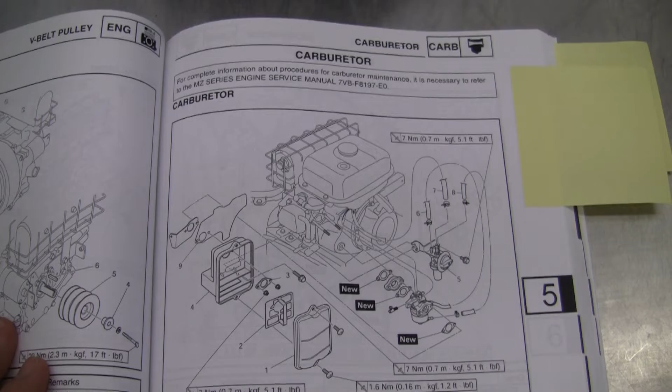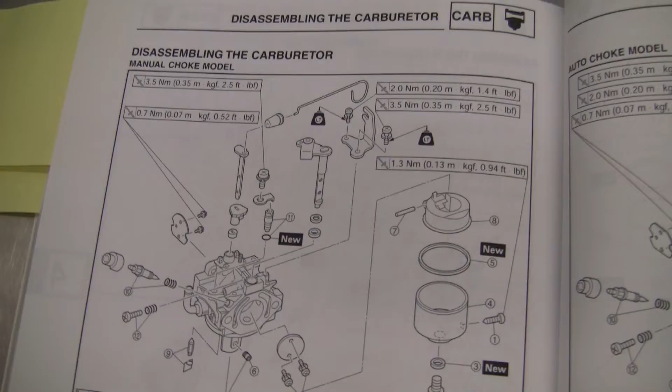Per usual here, I have the section on the carburetor in the snowblower manual. And we've also got section 4-1 of the engine manual. All right, we're gonna take our trusty Phillips screwdriver and take off this cover. So we've got the carburetor here. It's quite obvious, I think.

And the next step is to take off the air filter. Now, there is no air filter inside here because you're using this in winter. There's not supposed to be any dust, etc. So if you look inside, it's all just a passageway for the air, so no big objects will go in. There's the screen inside you want to take out. It goes in like this.

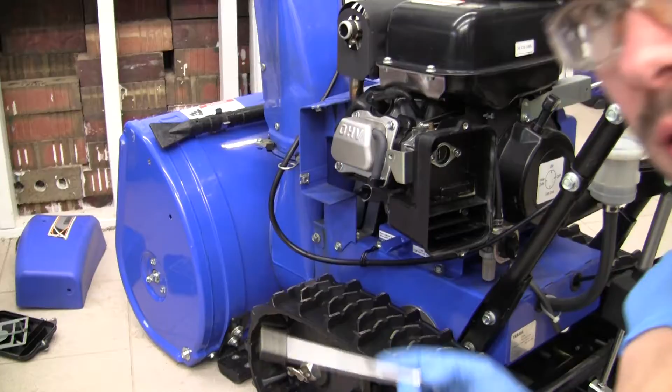So now we're going to use a 10mm socket to take off this plate that's in here. So there's 2 nuts and a plate in there. Oh, and there's 1 bolt down below.

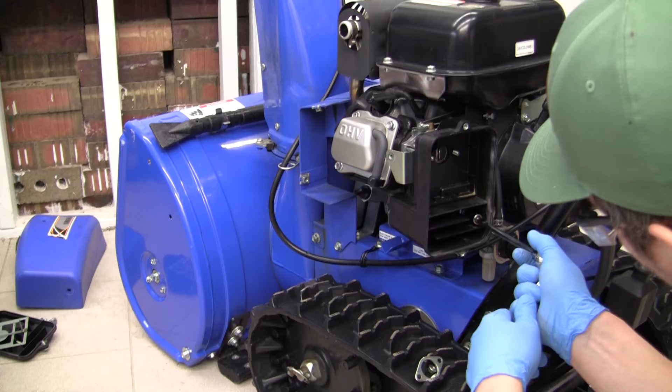Then there's this plate here. It's called a flap, apparently. So we're gonna keep going. The instructions say to remove this fuel cock, but I don't really think that's necessary. I don't want to remove more than I have to.

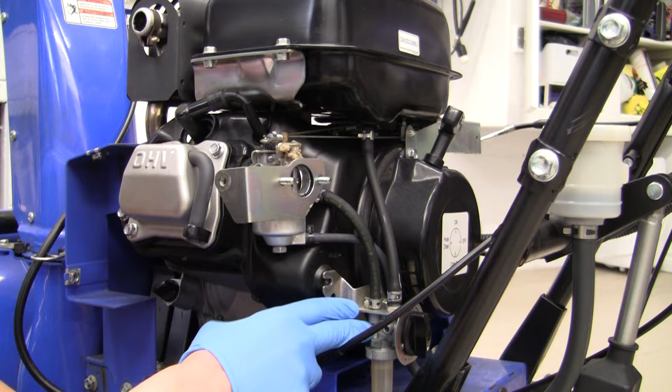So we'll then get this plate off, and there's a gasket there behind it. So this gasket kind of says to use a new one, but if you take it off carefully, we should be able to avoid tearing it. And I wouldn't use a new one unless it tears. Here, we'll put it back on in the same way. The carburetor has the 2 hoses.

We've got the drain line and the fuel supply line. Now, important point, this fuel cock is in the downward position and the carburetor drain position. So that means that the bowl has been drained through the small line, and the supply might have fuel in it because it's been turned off, but the carburetor bowl is empty. So I'm gonna unhook the hoses at the top here and let them hang up.

So I'm going to use a pair of curved needle nose and get in to remove that clip. And then my arm's kind of in the way here, but I'm gonna grab this clip and remove it as well. Slide it back. Now you wanna be gentle with these hoses. Take a flat blade screwdriver, pry off the hose. So gonna put the hose up in here temporarily. Then the bottom drain hose, pull off the drain hose. So now I'm gonna put both hoses up in here.

Here's the choke cable. And you can see that when you push the throttle lever, then finally the choke will engage and close off the air. So we've got 2 steps left to taking the carburetor off. We have to take the choke cable off, and then this will come apart by just turning it.

So to take this off, what I'm going to do is mark in blue with a marker where exactly it's set, so that after I take it off with a small Phillips screwdriver, I know where to put it back. So I'll then slide that off the end of the cable if I can. There we go, and I've got a blue mark on there as to where to put it back. So I'll keep this handy. And then we got the carburetor, and here there's the cable, which we can now get off.

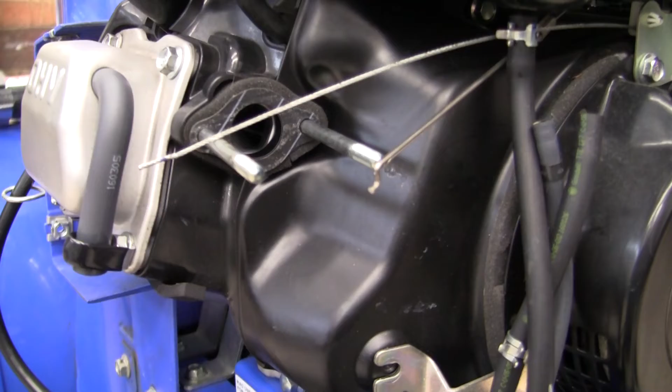So keep in mind here, there's another gasket located here. I wouldn't bother taking that off. If it's not torn, I would reuse it. And then in here, we can actually see the valves on the intake. So we'll let all this stuff dangle here while we go to the workbench.

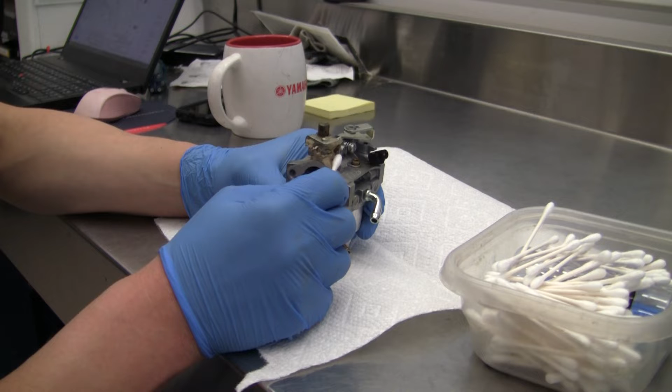All right, here we go. So we have the carburetor out. We've got the choke on the intake here. On the outlet side of the carb, we've got the air flapper, the slide or whatever it is. So what I'm gonna do here, because Yamaha was so generous with their grease, I'm gonna remove this grease so that I can avoid getting it everywhere and I can actually see what's going on in there.

All right, so the grease is cleaned off from that area. Now what we wanna do is make sure, while doing a carburetor, that we don't get anything in this port, we don't get grease or dirt crammed inside here. Because anything that blocks these ports is going to give us some problems. And then Luke's going to be pretty angry for taking something apart that really didn't need to be taken apart.

So we can see this moves nice and free, no resistance, nothing's hung up. When I look inside, it looks very clean, really. It looks pristine. So what I'll do now is I'm going to start by getting the bowl apart. And reminder, you see the clean workbench? Please, please try to follow this.

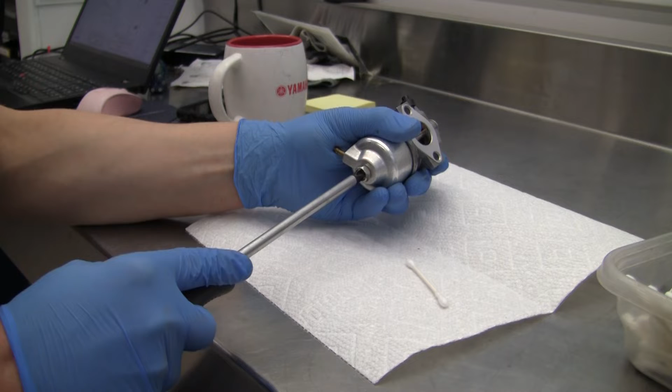So we're going to use our trusty Phillips screwdriver, and that is quite tight. And we got it. So here we've got probably a copper or fiber washer. It says to use a new one of these, but I'll probably avoid doing that.

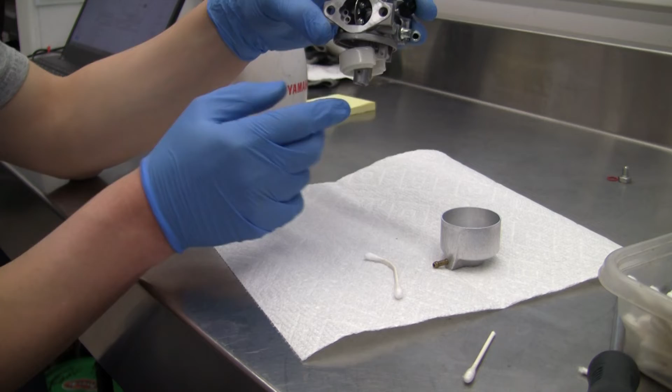So then pull the bowl chamber, or the chamber, sorry, off. We can see there's a gasket on the inside. So here we see we've got the float. Here we see the inside. It's pretty clean, to be honest.

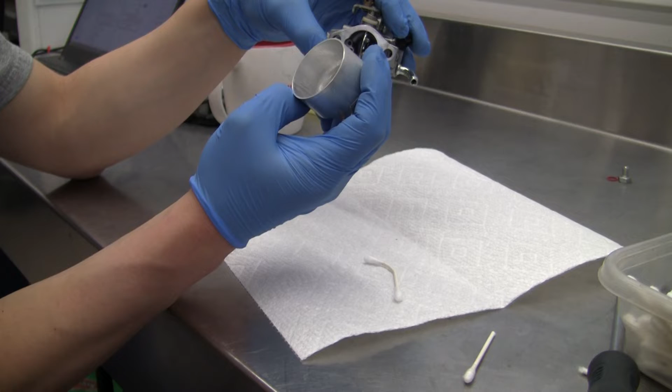It's quite clean, I think. A little bit of maybe deposits in the bottom. We see the drain is nice and clear. We see how the drain's set up in the bottom there. So what I'm gonna do actually is use my pick, and first of all, I'm gonna make sure the pick is clean, because that's a terrible thing to do, is stick a dirty pick in a carburetor.

So I'm gonna take this clean pick and get that gasket out. Now you wanna not tear it, so I'll kind of run the pick along the groove there, gently, both sides. This is a Mikuni carburetor. There you go, pop that out, throw that there.

Now we take the float out by pushing this pin out. Pin should come out, let's see. The pin should push out from one way or the other. Let's try it here. Oh, it's pretty tight. Yeah, that doesn't want to get out of there right now. I don't really feel like breaking it, obviously.

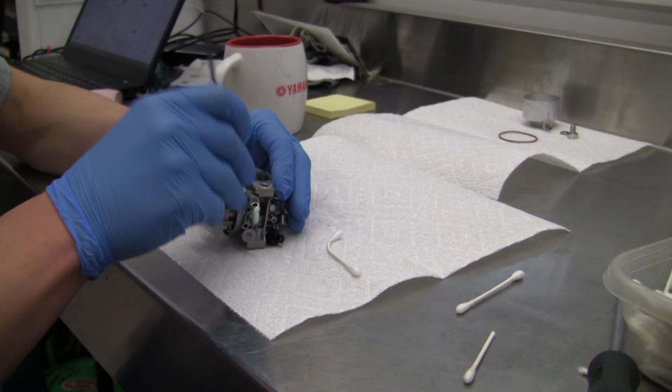All right, so we could push this pin out by tapping it gently. Something like a flashlight, nothing too heavy. I've seen people break these cast carburetor parts before, and if you break that, you're not gonna be able to fix it. So you wanna just tap that pin gently so it comes out.

Then once the pin's loose, now you'll see the orientation, I took mine out. Now this pin's actually flattened on the one end, so it's not gonna push out that way. You're gonna have to push it out the other way, otherwise the flat's gonna get caught. I'm gonna put this pin over there. I'm gonna now take the float out.

Now you see here, it's a plastic float with a non-adjustable float height. It's a plastic tab. We've got the needle assembly, which has the small carrier there, or I call it a carrier, I'm making names up now. So it's really hard for me to show on this camera, but this needle assembly that's attached to the float,

you want to look at the end of it, make sure it's not worn. And you would see if it's worn because you'd see indents or grooves in it. But here it looks really, really nice in my opinion. I wish I could get a close-up, but it doesn't really work well on the camera. So I'll put that down.

Now we've got that apart. We can look in the orifice where that component goes. So here we got the inlet, and the inlet comes in and fills the bowl. And once the float rises, it blocks off the fuel that comes in. So we can just kind of blow on this. The air is coming out of there, no problem.

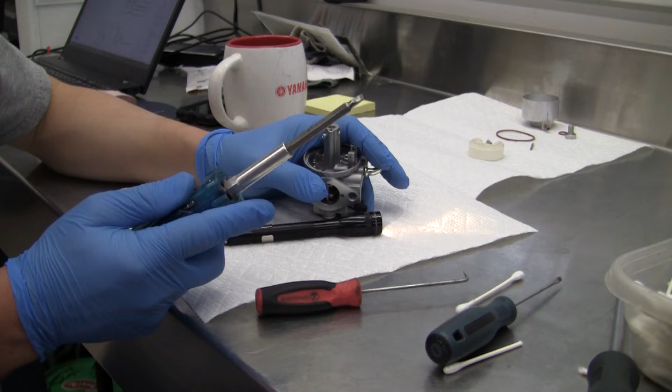You want a screwdriver ideally that's the entire width of the jet so that you don't strip it. So here we're gonna get a proper screwdriver in that main jet. We're gonna remove it, and we're gonna look through there. You look through and it is perfectly clean. We're then going to stick a proper screwdriver down in the hole here and remove that one. There we go.

And there we have it. So in here now, we wanna look down the center of this, but we also wanna look at the side ports. The side ports are perfectly clear, really perfectly clear. And I can look down the center and it's perfectly clear. So this is really, really good.

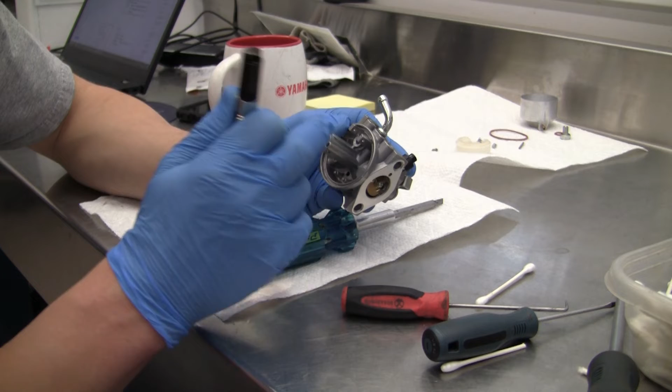So put that there. Now we also want to look where the needle sits to see if anything looks bad in there. And to me, there's nothing wrong inside there at all. There's no dirt, debris, varnish of any kind. All right guys, so there's some things I'm not going to bother taking apart. So if I took these two screws out, I could end up pulling the throttle assembly out, but I really don't see a need for that.

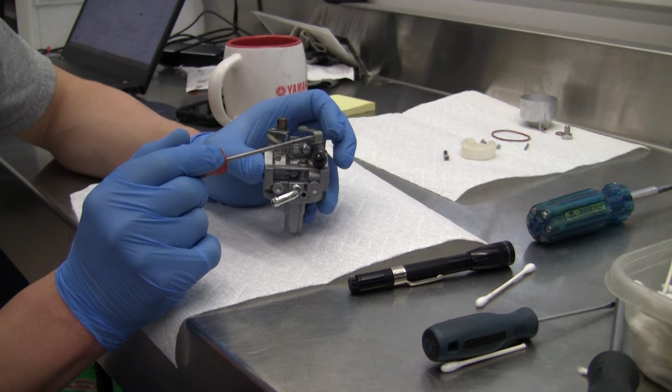I'm also not going to take apart the pilot jet, which is here. The pilot jet has an O-ring under here, which apparently needs to be replaced if you take it apart. Now, whether that's true or not, I'm not sure, but I don't really want to find out. We've got the throttle stop here, the throttle stop screw. I don't really feel like removing it just to have to reset it. It was set from factory and I don't really have a problem with that.

And then the choke assembly. I don't see a need to take the choke assembly apart. So the choke assembly is pretty simple. It just turns 90 degrees to block the air and some passages. We would take these two screws out and then pull everything out, but there's a spring and all kinds of stuff. So it's not a huge job, but I really don't think we need to do this for this video.

Principally, you want to make sure the jets are clear. The ones I've taken out, the needle's in good condition, and inside there's no dirt and there's no varnish and there's nothing. This is like a brand new carburetor is what it appears like. There's nothing at all that I can observe that's wrong with this thing. And I don't really want to start blowing air through there right now either because I don't want to get anything caught in there. So to me, really, really good, really pleased with it. It's a good thing to do, but if you keep your fuel clean, you shouldn't have any issues.

So what we're gonna do now is we'll put this back in there, stick that in the hole, and you don't want to over tighten these things. So you're gonna screw it in until it hits the bottom and then give it a little tighten, nothing crazy. We're gonna put the so-called main jet into the side. So once that's in there, I think these are aluminum too, so be careful. So you're gonna put that in, tighten it, don't over tighten that. And you have to take this side one out in order to get the inside one out.

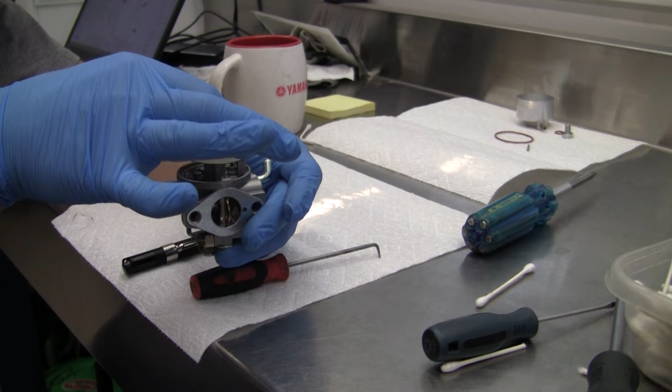Now with that done, we can put the carburetor upside down. Now what we're gonna do is hang the needle on the float and we'll drop that in there so the needle goes into the hole. Then we're gonna wanna put our pin back. So remember, the pin is flattened on the one side. So we're gonna put it in the side. It should go in very easily. You don't have to force that in there.

And once it goes through, we might have to tap it just the same. So what I'll do here, I'm just gonna tap it. That's it. Actually, I might like to get that in more than that. Let's see here. I'm gonna put the gasket back on. So this gasket's a bit hard to get in there. We're gonna have to coax it in. All right, I got the gasket back in there. You want to make sure to push it into that crack all the way around and don't get it twisted.

So now we're gonna put the bowl back on. So we just kind of put the bowl on. The hose will come out approximately where the other one did. I should have match marked these actually before I got going. And then we have what I believe is that copper washer. We'll put it on the bolt.

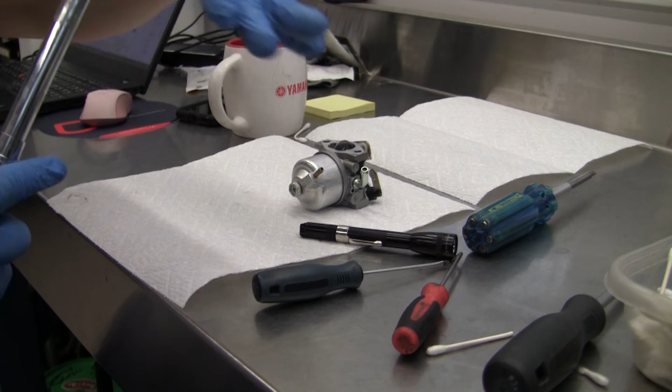So here we've got 9 Newton meters or 80 inch-pounds. I think that's tight enough. I'm not going to get this one torqued. Let's see where we're actually at. Let's try 60. Yeah, I'm not tightening that up that much. That's good enough for me. So there we go.

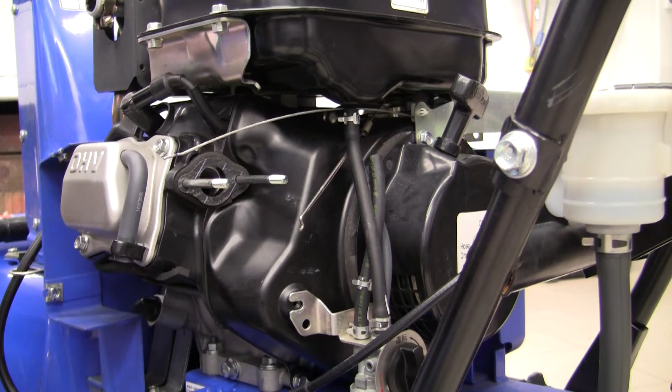That's the general disassembly of the carburetor. Now we're gonna get the carburetor mounted back on the snowblower. All right, so it's not a bad idea to have a look inside there with a flashlight. I had a look and it looks fine. So we're gonna take the carburetor, make sure your gasket is here. If it tore, get a new one.

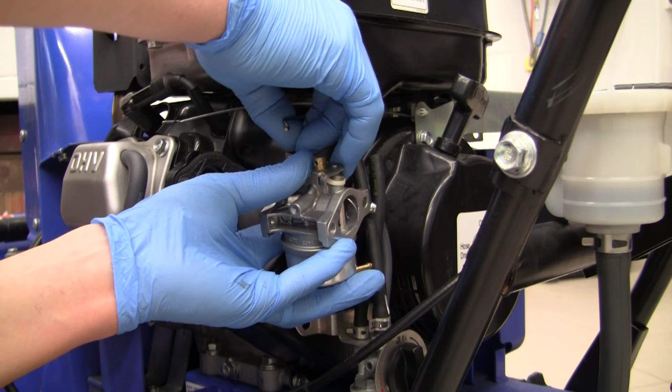What we're going to do is take the spring, we're gonna put it in that spot. Then we're going to tilt the carburetor so that we can get it like that. Then we're gonna raise the whole thing and insert it on. So I think I've gotten those actually twisted, which I don't want. So I'm gonna take that apart and go around. Now I'm gonna redo it, there we go. All right, perfect. So I've got the spring and the rod are not twisted.

I'm gonna put this back. It's gonna bottom out down there. And then I'm gonna take this gasket the same way I took it off. I'm gonna make sure it's clean. I'm gonna put it on. Then we've got this plate. I'm gonna put the plate on. We're gonna put the cable back through the choke assembly.

I'm gonna take the little collar with the spring and the screw. I'm going to slip it on, spring first. Then I'm going to find my mark, my Sharpie mark. Just pull a little bit out. There we go. We've got the identical position. Then I'm gonna take the Phillips and tighten that. So then we can test the choke. So the choke works.

So we're gonna put some Yamalube suspension grease just to replicate the factory install. We're now going to reconnect the fuel hose. So we're gonna stick that main hose on there. I'm gonna stick the drain hose on, the clamps rather. I'm gonna take the clamps, secure it on. I'm gonna take the other clamp and move it up and get it in there. There we go. So the 2 hoses are secured.

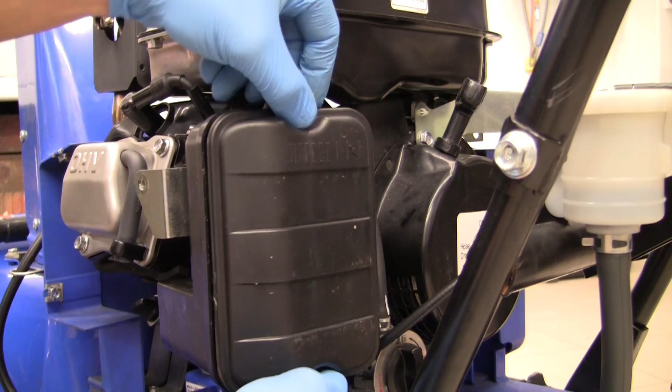So one of the final things you want to do is make sure that when you've reconfigured this that it still works and it holds. So for that I would say to put the choke on and see when its engagement point is and confirm that it works. You can see here as you get to the end of it, the spring kind of pulls in, but you can feel that choke come on the lever. So I'd say we're good to go on that. I applied a little bit of grease there, and then the throttle we're gonna make sure that it just moves. And finally now we're going to proceed with reinstalling the panel.

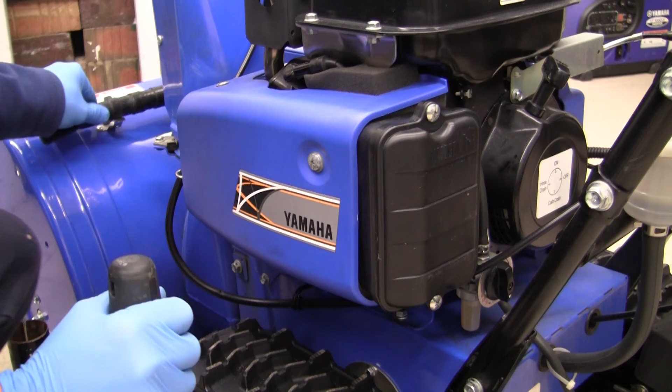Here we are, outside, first start of the year. I did the carburetor maintenance before I ever started the machine up this year. So myself and Yannick are going to go for the first start of the season. We're going to turn the gas on. Hope we got no leaks. So the gas is on, carburetor is going to be filling up. We want to give it about 15-20 seconds to fill. And then we're going to turn the key on. Should have the light. Then we're going to apply the choke. Here we go. We'll go for one more start.